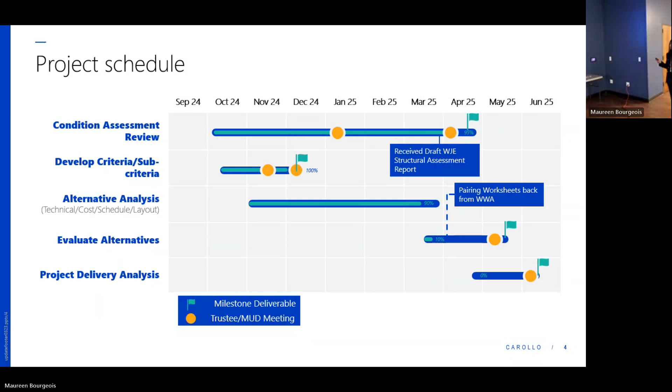So let's talk through the existing condition verification update. The next 2 slides are going to be a recap of some of the information that was already presented at the trustees meeting.

Our scope included verifying the previous assessment that was performed by another consultant, reviewing and updating the condition data that was developed before, because that assessment was done in the 21-22 timeframe. So we wanted to update what the condition of all the assets at the treatment plant were. We also wanted to calculate the remaining useful life of each of the assets, and then based on the assessment, come up with a list of repair-in-place components for each of the assets at the treatment plant that would form the basis of our base case, alternative 1.

While we do that, we were also tasked to perform a regulatory compliance and deficiency review to make sure that the existing plant can meet the TCEQ criteria, which is based not only on the process capacity of each of the process units at the treatment plant, but also the hydraulic capacity of the plant. So we did perform that evaluation report.

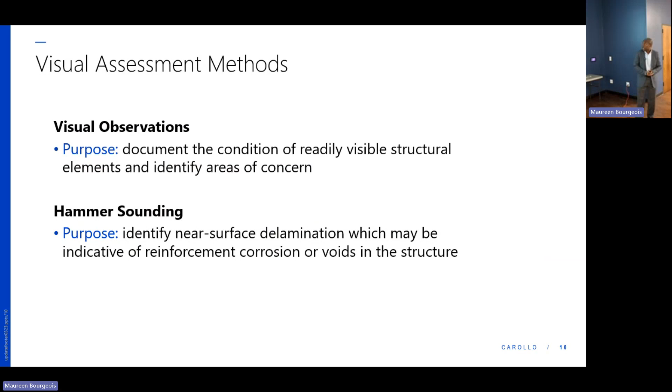Let's get to non-destructive testing methods. As the topic indicates, it's non-destructive—we don't want to do anything that will bring damage to the structure. All these testing methods result in no damage to the structure; it leaves the structure as is, as we saw it, so that it can continue to function.

What is the purpose of it and why do we want to do it? For half-cell corrosion potential, it helps us identify whether there's active corrosion taking place. We get a reading, and from that we're able to interpret whether there's active corrosion behind the concrete that we cannot see. Electrical surface resistivity determines the risk of corrosion—what's taking place behind the surface when we put the equipment there to give us that data.

Linear polarization determines the rate of corrosion—how fast is this thing corroding? That equipment is also able to give us that data.

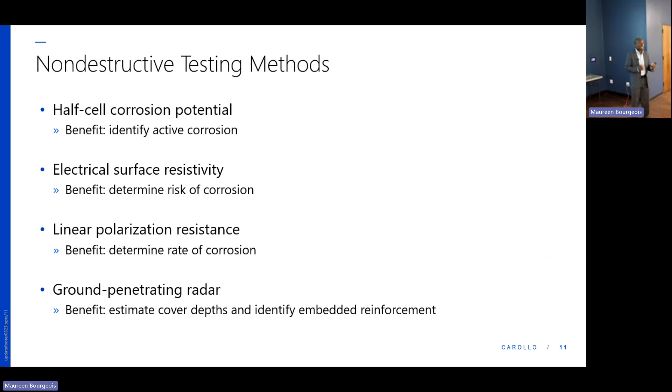Let's get to laboratory testing. While we can do the earlier equipment-based testing, there's still stuff we generally cannot see, and we have to go into the lab to do more in-depth study. For the structures, we took cores—basically we drill a core sample, a 4-inch diameter by 8-inch long sample from the structure, a concrete piece. We extract that out and then test it in the lab.

There are various tests that we do on these cores. For all the structures, we did a total of about 26 cores to test them, because we wanted enough data to come up with a great assessment of what we are actually seeing. What are some of the tests we did on these cores? Let's start first with carbonation testing.

When we think about air, air is made up of different components, and carbon dioxide is one of them. As humans, we don't inhale carbon dioxide, and it's also not good to some extent for the concrete. Here is what happens: when carbon dioxide comes in touch with the concrete, it actually begins to work against the chemical properties in the cement.

There are hydroxides, some chemicals in the cement, and it breaks it down. The cement is typically alkaline. The opposite of alkaline is acidic, so it's not acidic. But the carbon dioxide reacts with it, breaks it down, and gets the concrete to go in an acidic direction. That is really not good for the reinforcing in the structure. So now it begins to deteriorate the concrete and then begins to deteriorate the reinforcing with the right amount of water and oxygen when they come in contact with it.

So we want to measure that level within the structure. Because we know the concrete cover, we're able to do that. How do we test for the carbonation?

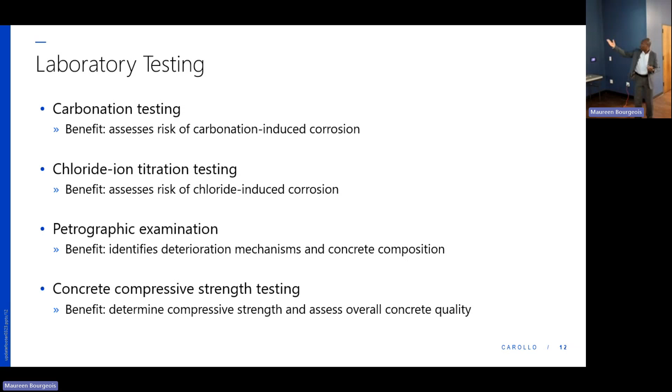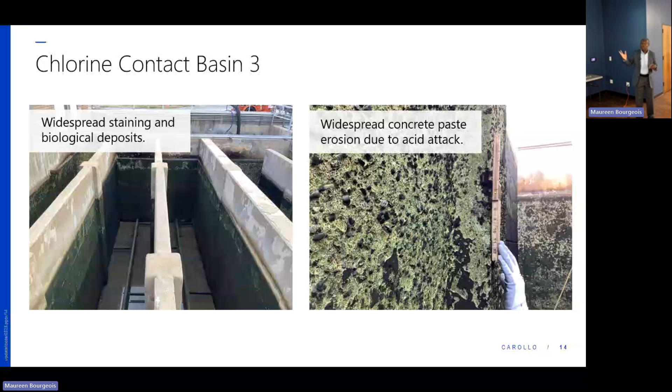Additionally, because the bacteria is so active in this environment, it also begins to attack not just concrete but other elements of the structure. For example, in the chlorine contact basin, we had a concrete masonry unit, CMU wall, that was easily abradable - you could easily take a sharp edge and scrape it off because it's a very aggressive environment and the bacteria is beginning to eat it up.

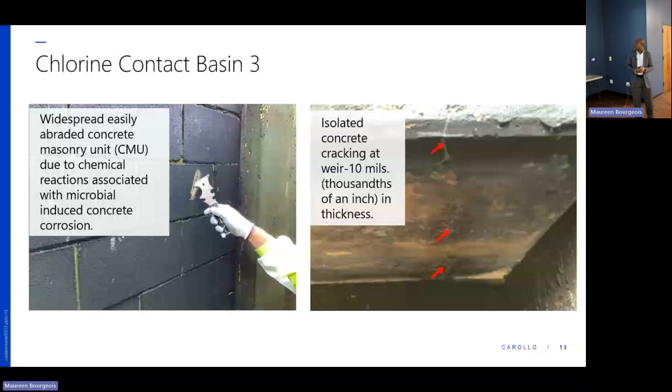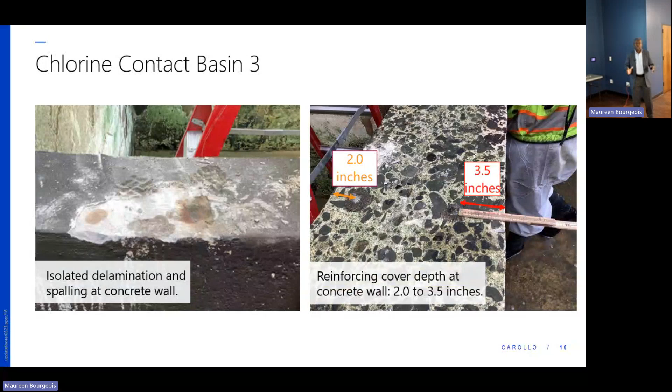So after all our analysis of the chlorine contact basin, what is our recommendation? Well, we recommend periodic visual observation, just like we did, every 3 to 5 years, just to see the structures continue the way they are, or if they deteriorate further and need further action. Non-destructive and lab testing and in-depth study, we suggest every 10 years for that to be performed on the structures.

And then in areas where we see delamination, spalling, as shown in the previous pictures, some with acid attack and things like that, we are recommending concrete repairs and the application of a coating system to protect the structure and extend its longevity. We are recommending all these repairs and coating applications to take place within the next 3 to 5 years - a good time to actually do it.

That'll also be the same recommendation for replacing the CMU wall, the concrete masonry wall. We are recommending actually replacing that with a concrete wall, since that will give more durability, and that can also happen during the repair work within the next 3 to 5 years.

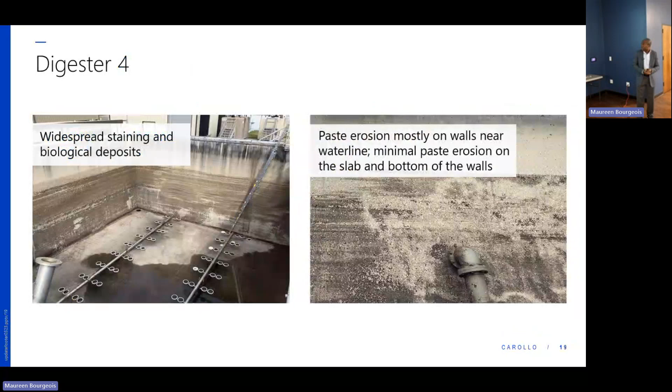At the bottom of the walls and at the slab, none of that was observed, which is typical for such structures. On one end of digester number 4, though, we talked about the concrete cover - there you can see particularly a reinforcing being exposed. Likely the concrete has spalled off or broken off due to some corrosion, something happening there.

The reinforcing is too close to the edge, so you don't have that 2 inch cover, but that's an isolated incident. We captured that occurring there as well.

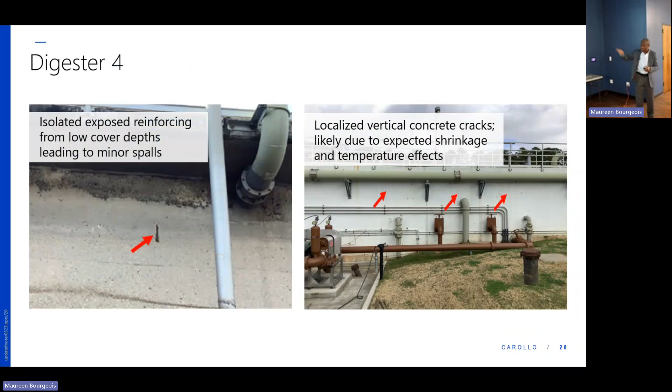As we walked around the structure, we see local vertical cracks, very fine hairline cracks. That's typical because with concrete you have cycles of temperature, cold and hot, which allows the concrete to expand and contract, causing these temperature or shrinkage cracks. None of these that we saw were leaking as far as we could tell.

So what is our recommendation for digester number 4? Again, the same thing: periodic visual observation every 3 to 5 years, monitor just like we did to see if anything changes. We've also recommended non-destructive or lab testing every 10 years to see if the situation deteriorates from the benchmark we have today.

For those areas where we have localized spalling with reinforcing exposed, we recommend concrete repairs and application of a coating system, at least on areas where the paste or surface of the concrete has eroded. We recommend that work take place in the next 3 to 5 years.

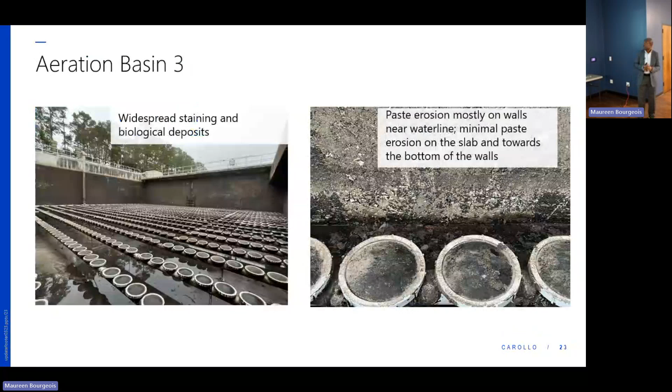So for aeration basin number 3, what are we recommending? We did all our non-destructive testing with our equipment, and it reveals that the reinforcement is not actively corroding in the areas of the walls and slabs that we tested.

The cover depths from our equipment testing show that the walls have about 2.8 inches of clear cover. We talked about needing a minimum of 2 inches from the face of the rebar to the face of the concrete - we have 2.8, so that's good news. At the slabs, we have 4.8, also good news.

With the laboratory testing, we took 8 cores for the various lab tests we talked about earlier. We start with compressive strength - the load the concrete needs to see before it crushes.

That load for this particular structure ranges from 4,700 to 8,000 pounds per square inch. The minimum we want for this structure, documented on the design drawings, is 4,000. We exceed that, so the structure has the structural capacity to hold.

Carbonation depth, we have 0.25 inches. When we looked at that, we talked about carbon dioxide attacking the chemicals in the concrete. We have 0.25, and our clear cover is 2.8 at these walls, so that's also not of concern.

And then chloride concentration - when we did all our chemical testing in the lab with the amount of chloride ions, we came to less than 350 parts per million, which is the benchmark. You want negligible risk, and so the structure is not at risk from chlorides.

We also did one more thing here, petrographic examination, because this was one of the structures for the in-depth assessment. We could see that the first 0.1 to 0.2 inches was deteriorated due to the sewage attacking the face of the concrete. We saw that in one of the pictures where the paste was being eroded. But again, it's not to the cover. We had enough cover to be able to get things to look good or work.

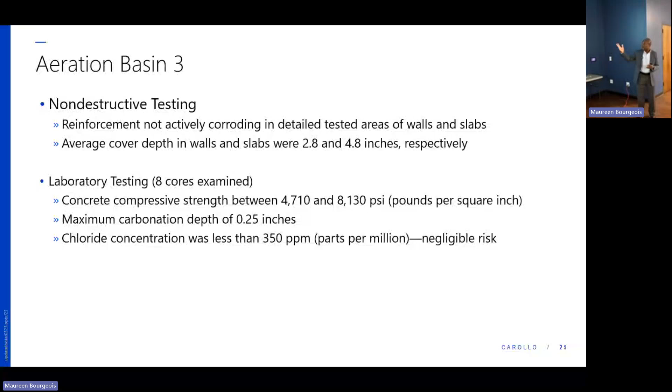So what is our recommendation for the aeration basin? Again, visual observations every 3 to 5 years to take a look at that visually and see how that structure is still performing. Then non-destructive and lab testing, which we talked about, every 10 years. And then we are recommending those areas that are delaminated. We saw the earlier repairs. We said the voids are likely there. We need to concentrate on it. And then also the paste on the surface being eroded, applying a coating system. We recommend that work take place in about the next 3 to 5 years.

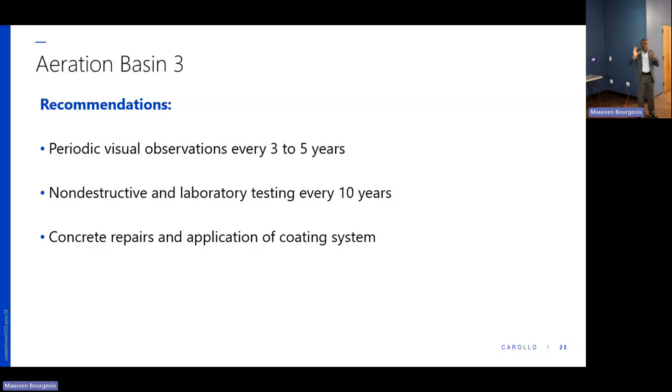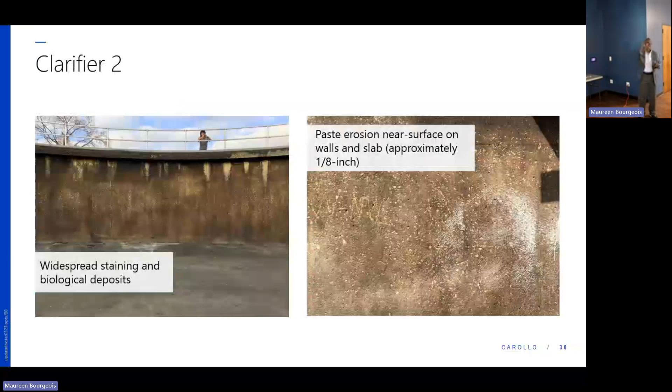So what did our non-destructive testing reveal for clarifier number 2? Well, the reinforcing is not actively corroding in the areas that we tested. All the handheld equipment testing data verifies that. The cover depths that it measured was 2.3 and 10.1. In the walls of these structures, we want at least a minimum of 2 inches. We do have that here, so we are good there. We tested 10 cores in the lab under the additional lab testing to verify the compressive strength, which tells us the strength of the structure.

Again, it's well above the 4,000 mark, which is on the drawings. In this case, we're in the 5,000 to 8,000 range of all the cores that we tested. So the structure is structurally sound. Carbonation depth 0.13 inches, also less when we think about the cover, so we have enough. And then the chlorides are also below the 350 parts per million, so it's considered negligible risk.

There's the good news - the petrographic examination showed no ASR was observed. We talked about ASR earlier. All 3 cores we looked at here, no ASR was observed. Under the microscope, 0.16 to 0.2 inches of concrete was deteriorated. The clear cover was 2 inches, so we have a little bit to spare.

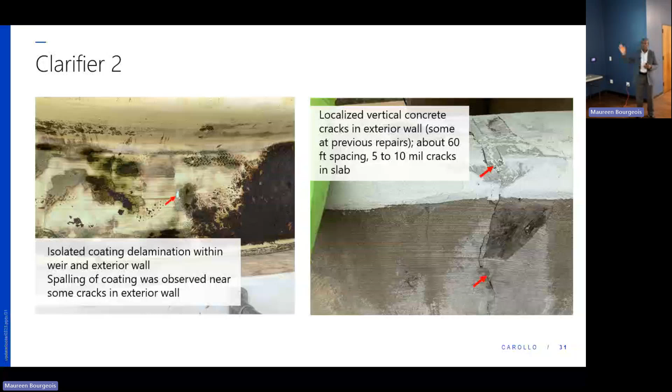So again, similar recommendations: visual assessment every 3 to 5 years, non-destructive and lab testing every 10 years. For the areas, especially at the top where we saw that massive, aggressive erosion, we recommend concrete repairs for the cracks and application of a coating system. We recommend that work take place within the next 3 to 5 years. For the lift station, since that's an aggressive environment, when we go in to do the concrete repairs, we should also look at an additional in-depth corrosion assessment to see what further protection the structure needs, just to extend its service life in the long run.

Then we come into the pump room, which sometimes we also call the dry room, because that's not the wet section. In the picture on the left, we see some staining and efflorescence in some of the wall cracks. What is efflorescence?

When you have a crack, usually in the concrete wall or in a slab, water begins to migrate through it. As the water migrates through the cracks, it reacts to the chemicals in the concrete mix or in the cement. As the water gets to the surface, it evaporates and leaves behind these whitish chemical deposits. That process, with that deposit being left, is what we call efflorescence.

The next slide will show a zoomed in picture of what one of them looked like. At the bottom, in one localized corner, we saw water ponding at the perimeter of the wall. That's likely coming from leaks from those cracks or some of the pipe penetrations that go through the structure.

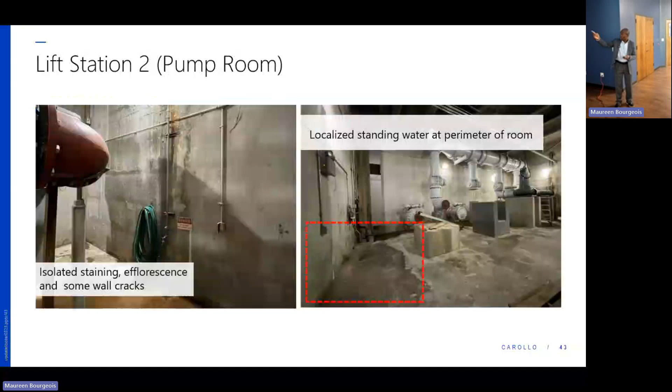We also saw local coating coming off the wall, so delamination, falling off, peeling off from the wall. We want to address that too. That's the efflorescence in a zoomed in view, as you can see with the whitish substance being left behind as the water evaporates in that crack.

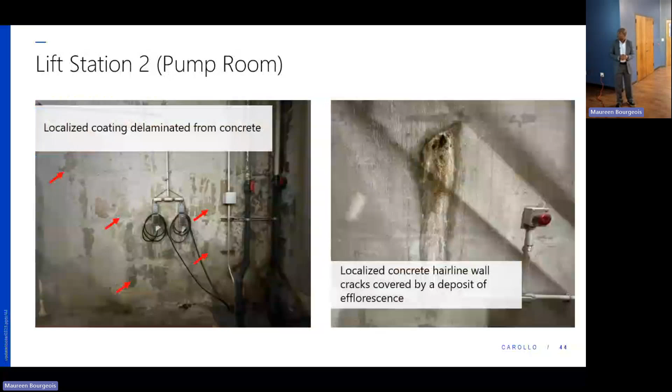What did the non-destructive testing reveal? No active corrosion, but it also showed a lot of moisture at the bottom. The previous picture I showed, with that water ponding, captured that it's very moist at the bottom. The cover depths measured with our equipment were 3.8 at the walls, 10.7 at the slabs; we want a minimum of 2 inches, so that was good.

We also tested 8 cores here. We're in the 6,000 range for the compressive strength, well above our 4,000 mark for concrete, so that is good. Carbonation is at 0.63 - we have enough cover to accommodate that - and the chlorides here are also negligible.

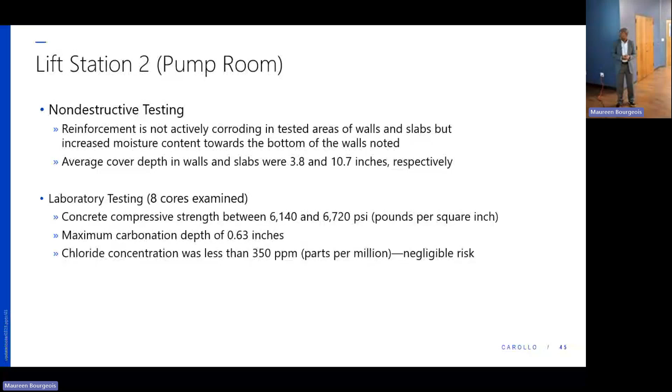So again, petrographic examination - looking under the microscope - what do we see? No ASR were observed in the 3 cores that were tested. Concrete here shows no deterioration, that's the dry portion, and there are no other mechanisms for cracks that we saw in this segment.

So recommendations: 3 to 5 years visual assessment, just like we did, to see if anything is changing from these structures. We also recommend in-depth analysis every 10 years. In the areas where we described the efflorescence and the minor cracks, we want to go in and fix it. In areas where sewage is probably affecting it, just like the wet well, we want to apply a coating system when we do this work. Our recommendation is in the next 3 to 5 years.

Plant capacity assessment.

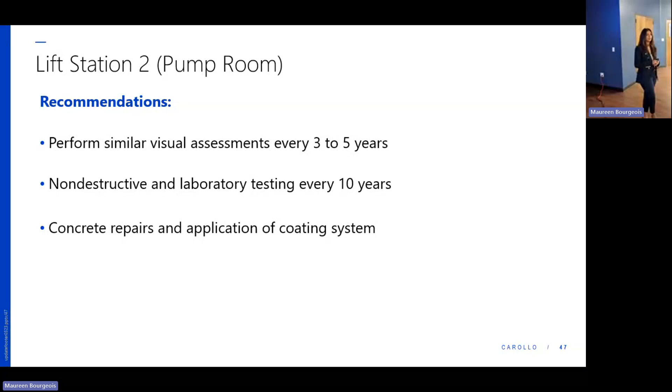Yes, we can, but I thought this would be helpful for you all to understand, because the existing plant condition or the assessment of an existing facility is not only condition, but it's also condition plus the capacity.

Sure, we can take those questions. We have noted the questions downstairs, so we'll definitely come back and bring back the slides, if that makes sense. No, it does.

All right, so as I mentioned, the existing plant capacity is equally important when we are looking at the assessment of the treatment plant, because we are not only looking at the condition of the assets on the ground, but also whether those assets can treat the capacity or the flows that are coming through the plant.

So how do we go about doing the capacity assessment? We are looking at two main components: incoming wastewater flows and the water quality coming in. So what is the load coming into the treatment plant? And what are the TCEQ permit requirements for what's coming out of the plant?

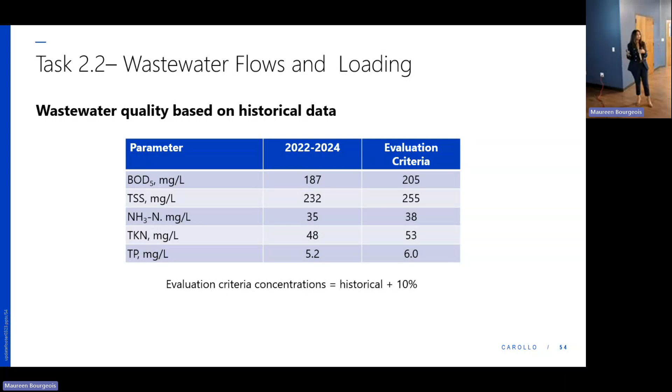As I mentioned, we talked about the wastewater treatment influent flow coming into the plant, the loading, and the TCEQ requirements. Now let's talk about the treatment process itself. Can the treatment process treat what's coming into the plant and still meet the TCEQ requirements? To do that, we look at two specific things: the process capacity and the hydraulic capacity of each process area. Process capacity is the ability to treat the wastewater flows and loading to meet TCEQ Chapter 217 criteria. Hydraulic capacity evaluates whether each process area can convey the peak 2 hour flows through the plant, regardless of the process capacity, so the water can flow through each process area without submerging weirs or overtopping walls of each structure.

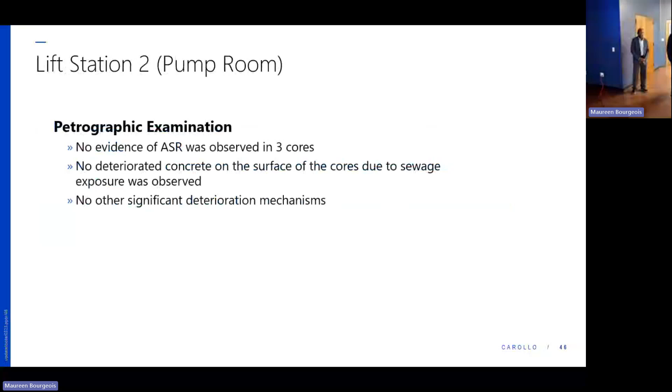Taking questions. She has a list of everybody that raised their hand for a question, and we're going to go through the slides.

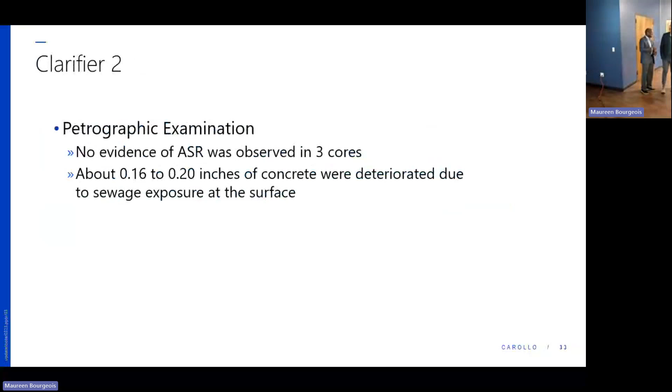Slide 6. First off, great presentation. A lot of really good engineering work has been done. Appreciate you taking the night to update us on it.

Okay, I'm Brad Hound from MUD 7. I want to say thanks so much for taking time to present this tonight. A lot of really good technical work. A couple of questions on slide 6.

So you refer to remaining useful life values being calculated. I did not see them in the presentation. Granted, I didn't read every page of the technical reports, but I didn't see that. That seems like it would be something very useful for us.

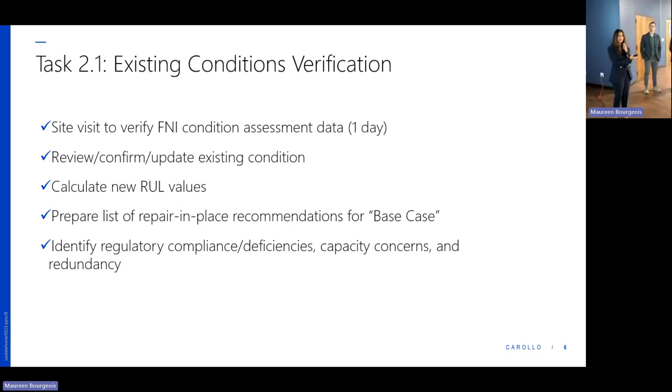So we have to now go through that. So between that 60 to 70 years, what has been spent, now we know what WJ recommended, so we can take their recommendation, subtract that, and give us the...

No, that doesn't answer my question. The question is, if you do the recommendations that are on each structure, does that get you an additional 20-year useful life? Thank you.

Also, yeah, wait, push the button. Yeah, well, Brad asked one of my questions.

The other question I had was regarding preparing a list of repair-in-place recommendations for the base case. Was that just a summary? I'm sorry. Yeah, of course.

On your fourth bullet point, Brad asked about item 3, and I just want to clarify on 4. Are those repair-in-place recommendations for the base case the ones that were in the recommendation slides that you presented in the presentation?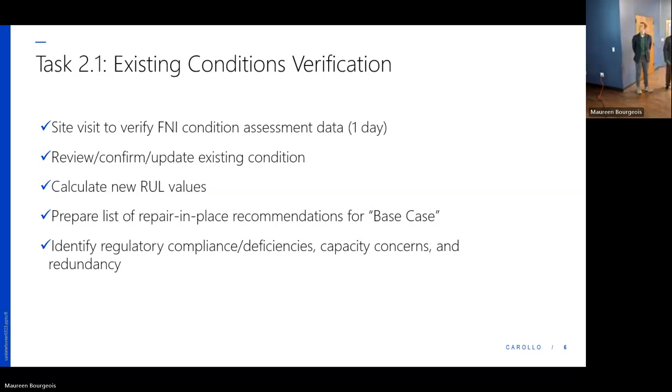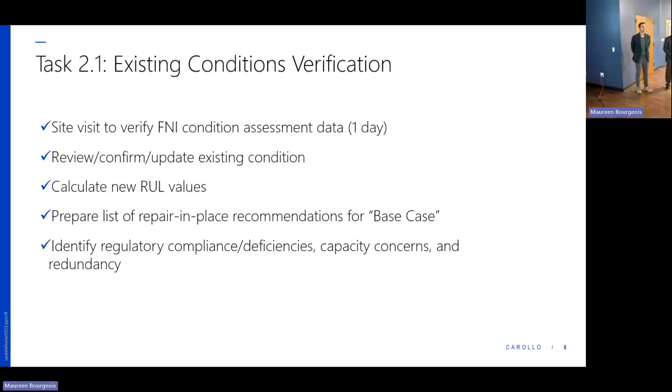Your microphone. Okay, my microphone. Okay, I have a question about remaining useful life. So a number of, I gotta press the button? Stand up. Oh, stand up. Oh, we don't have a read. Okay.

So I have questions about RULs. A year or so ago, I read a document published by SGRA which detailed out, by asset tag, all the remaining useful lives of every asset tag they have. Is that the base document you're using to establish the remaining useful life, that document that SGRA has to pay for?

Previous report, we were reviewing, and we were to go out into the field to compare our field observations with the remaining useful life that was in the report. So that was a point of reference, but we were using our on-site assessment to understand, from our point of view, how much life is remaining on your assets. Does that answer your question?

So I guess my observation is, if you go back to that report, it's a single statement: it's a pump, it has 7 years remaining useful life. It gives no more detail than that. And you know as well as I do, any moving equipment, which this organization is packed with, depending on how often it moves, how it turns and twists, has a unique useful life. So in that document it just says it has 7 years. It doesn't tell us anything about the condition, the age, the date of installation, anything. So I'm just curious how you can establish a remaining useful life when the beginning input is an asset tag number with the statement that it has X years useful life. I guess I'm a little concerned that we're taking shortcuts.

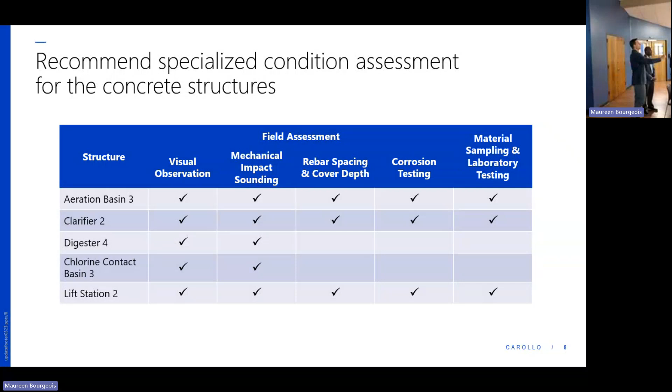That's my first question. In particular for that, our petrographers look under the microscope. We're able to evaluate what the water-cement ratio might have been, or the coarse aggregate size, or the sand that was supposed to be used. We don't have that original specification to compare it to. We're confident in what we saw, and everything we have in our report says here's what we had, water-cement ratios between 0.4 and 0.5, that kind of stuff. We can't compare it back to a known design and say it did or didn't meet the original design intent.

Okay, good. It looks like pretty good for good purpose, does it really matter? No, you just didn't have that to start with. We didn't have a starting point. Your testing looks like it's still pretty good concrete, right? Yes, it's got the testing strength you need.

All right, the second thing is around the assets that weren't studied. We picked a few here, and I think you said, Kwesi, that you thought this selection of structural components was a good representative sample. How good do you feel about that? Give me an example, I want you to address directly, I think it's clarifier 3 that has the bulging wall, the famous bulging wall.

The Aeration Basin 3, okay. How good do you feel about this correlation from one asset to another, the one you tested versus the one you didn't test? And how confident should we feel that there's not some problem with just drawing that assumption to the rest of the asset base? Very, very, very good question. So what we did was we sat down and listed all the structures, and we have the drawings, so we looked at which year these sets of structures belonged to.

Right, so that's the age piece of it. And then we also looked at, for example, the field report of the one that was bulging, that's the Aeration Basin 3, that's the worst case condition, so for sure we wanted to test that. We selected the Aeration Basin 3. And then the size of it, just the sheer size, is one of the big structures, so you sure want to test that. And that correlates with some of the structures constructed around that time frame, around that year.

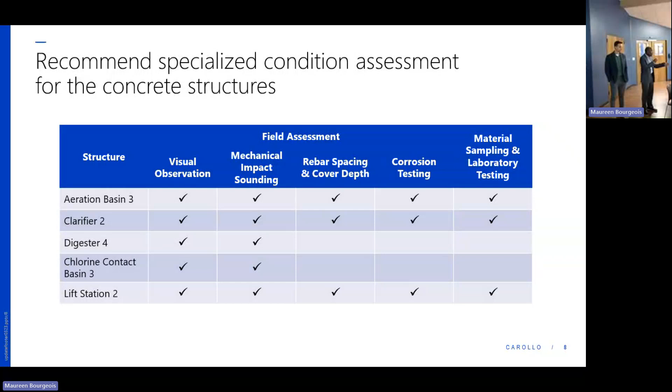So we looked at that piece of it, very confident, because to be representative of the concrete mix used during that time—since we don't have a specification to go to, we have the drawings that tell us, but we want to verify it, so at least with that benchmark we are confident. And then we pick other structures, because as a structural engineer, you design different structures differently. So I picked a square one, but I wanted to pick something not square, so I picked a circular clarifier, which was also constructed at a different time, so it would likely have different properties, and that will correlate with some of the facilities.

So for each facility total, we grouped them by drawing set, making sure we picked representatives from all of it so we could be very confident we'd captured it. And then from a visual assessment, which ones had more cracks than others, those were good candidates. Which ones did we get reports from staff about, like this bulging wall fixed—those were good information to have. That really helped us narrow it down to pick some good selected structures.

So we should feel good about being able to extrapolate this information to the other structures and have a high degree of confidence in that. That's what I'm saying. Okay, absolutely. And the data so far, it correlates. As far as the fight, if we saw some unique variations, then we'd start saying wait a minute, let's pause and take a look at something. But it really correlated. That gives us full confidence.

And we look back in the codes for those areas where it was constructed. That's why the 4,000 benchmark is critical, because that's what was used back then. And even until today, the minimum is 4,000, right? So those things give us a good feel for the good work that was done.

Perfect, thank you. These are the same structures that we talked about in the January trustees meeting. Yep, I remember. We move to slide 18. And then Mr. Smith.

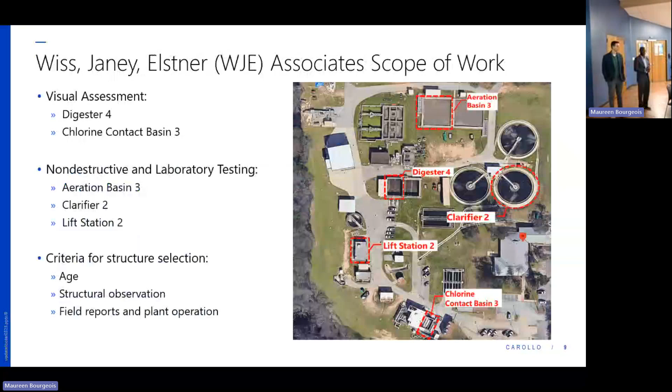Did it as well, but the detailed assessment, lab testing, WJE testing - the WJE report is only an appendix to our assessment. Okay, so you're still doing the mechanical, electrical? No, you don't have it yet. That's the report we're working on.

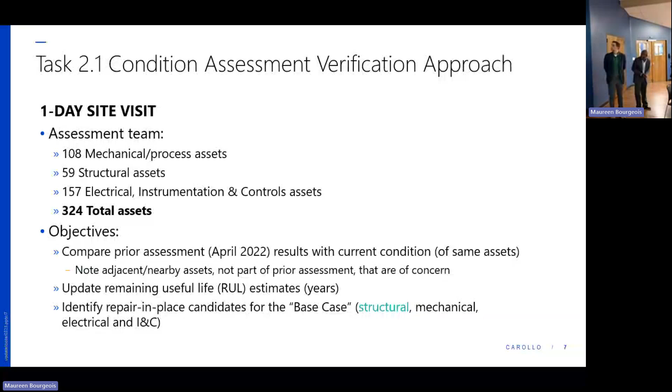Slide 18, folks. And we have Mr. Davis. 17, 18. Yeah, so maybe you have the wall.

You talked about the CMUs, the concrete masonry units, and you recommended repair of that CMU, replacement. What's the advantage of doing CMUs versus concrete? Especially in a wastewater environment, it's very corrosive in nature. It will eat it up, and we are looking at the longevity of the structure, extending it not for 1 or 2 or 3 years, but wanting to extend it out further. With the concrete, you get that capacity for a longer time.

If you notice, just out of the picture - it's difficult to see here, but these original walls where the dumbbell kind of columns are, it's like this dumbbell-shaped structure of the square wall. That's all concrete. It's these supplemental wing walls that were added later that are CMU. So it's not a whole lot of the walls that are CMU, but there are portions of them.

And my hunch is CMU is cheaper to build, for sure. There's no reason to do it, but yeah, that could be replaced. It's not the entire structure - there are small portions of the walls.

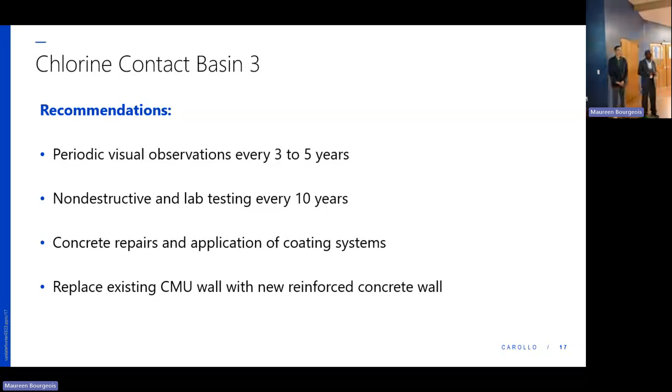I'm with 146, and I've got a couple of questions and observations for you folks. First, building off Brad, John, and David's comments on the remaining useful life, it would be interesting if we could get a simple chart talking about when that asset went into use, how long it's been in use, how many years are left, the remaining useful life, and if we could take some type of preventative steps prior to the expiration of the remaining useful life.

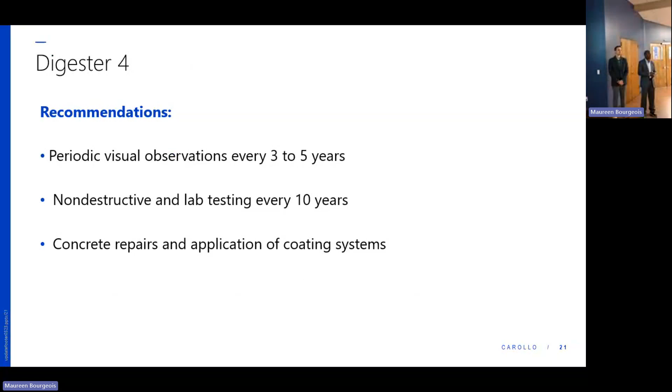And it begs the question of preventative maintenance, because several times in your report it was indicated that you could not do visual inspection due to paste, gel, whatever the case might be, staining and the like. It seems to me that 3 to 5 years for periodic visual inspection is a little long. Most PM programs, at least in manufacturing experience where I come from, happen every 6 to 12 months. And whether it's scraping - I guess the current technology is scraping, water jets.

Some of my research talked about other processes such as impressed current cathodic protection, chloride extraction, realkalization, and electrokinetics. And I don't know if any of that has been included in your thought process for not only extending the life of what we have, but looking at the new technology that's available, even in cement manufacturing process, because I did some research of current literature. And there was one article that I wanted to refer to you, if you've not seen it or not aware of it, and I have it here someplace.

Yeah, it was an article by Michael Bernard, published in September of last year. He talked about the electrochemistry that makes low carbon cement and also makes it more solid. The reference I got was from Futures Electronics, and they referred to one company, Sublime Systems in Massachusetts, which manufactured this process. If they have enhanced concrete production coupled with those processes I mentioned earlier, that could help mitigate the issues not only of the chemical reactions, but also of the bacterial, anaerobic and aerobic organisms that grow. It could be helpful to expand even to a further length of time.

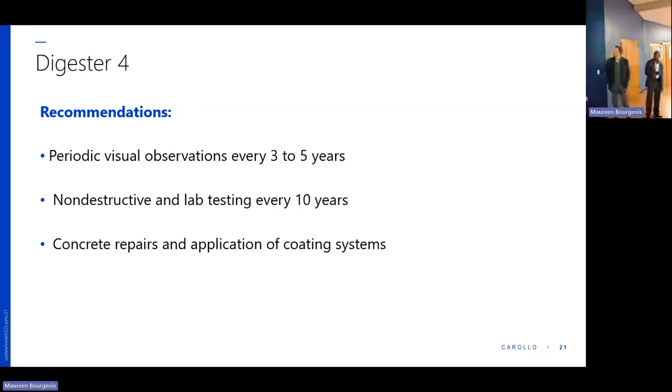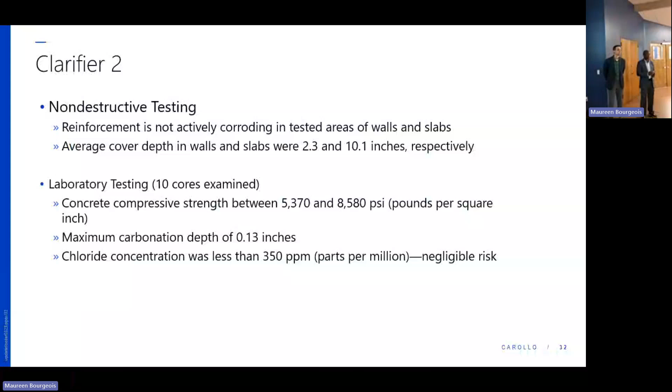Mr. Smith, yeah, this question was for you. Recommendation -- I had one before that too, let me ask you that first. You have carbonation, chloride concentration less than 350 ppm, and cement coverage of 2 inches or more. What's the minimum and maximum of that you look for in the 350 ppm?

That's when that protective layer over the steel can start to break down, and now the reinforcement can corrode. If the chloride concentration goes above that, say 500, 700, 1,000 ppm, it's much more likely that things are corroding. And we were a lot lower than this in most of the structure.

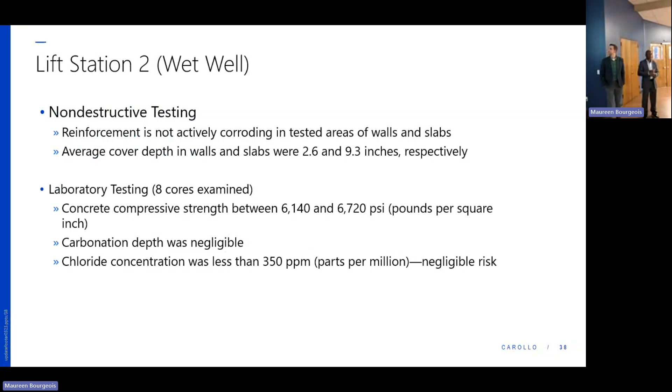Okay, now lift station. Yeah, lift station. So Ed, I'm going by memory here. Sometimes you forget. I remember looking at a 10-year plan, probably 3 years old. In it, you talk about the rehabilitation of lift stations, and you had like 2.7 million or something to rehabilitate. But I thought that was lift station 1 that you wanted to rehabilitate.

Lift station 1, and Chris helped me, I may need some of your memory too. We had in the 10-year project plan to do some rehabilitation and set it aside until after these studies could be completed, so that we didn't do something that would end up being wasted if a new station was built. And remember, we're doing the optimization of lift station 1 and 5. So when you were speaking, yes, both lift stations.

Lift station 1. 2. Okay, I just saw one of them, I thought it was 1. You were talking about the reason to rebuild, let's just say revitalize, lift station 2 because it didn't have enough pump stations. But lift station 1 has 1 or 2 more pump stations, and I thought that was the reason why you chose to rehabilitate that one versus 2. Am I missing something here? It's been a lot of years.

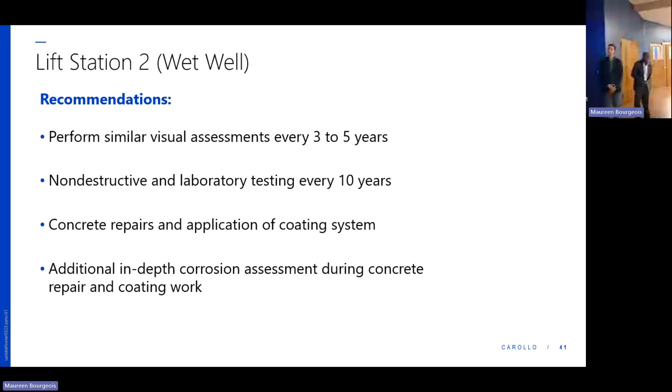Any questions? I think so, on the recommendation side. It's nice to see historical evaluation criteria. I guess I would like to see current permitted, current design. And I was surprised to hear what I thought was your comment that the current plant can't meet its current permitted capacity. Is that your current conclusion? Yes.

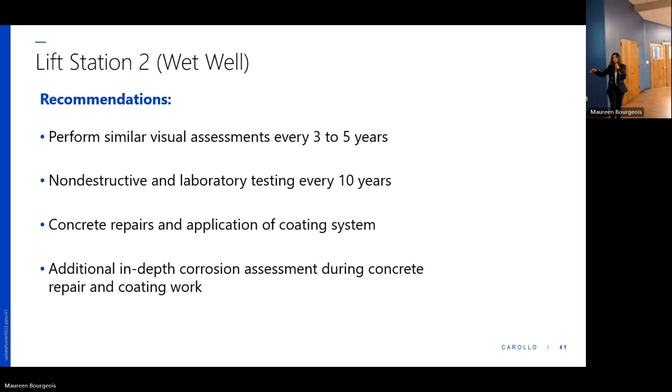So I'm not sure, I mean it seems to me like you're building a design case for a 2-hour maximum flow that's higher than our current permitted. And I also thought you said we couldn't meet our current permit, but I thought we could meet our current permit. So can we meet our current, is the kit on the ground adequate to meet our current permit?

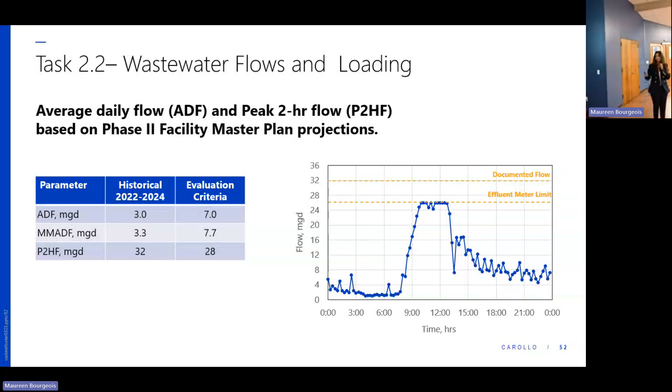So I think we'll take this offline, but I think we're very, very concerned about the basis that you're using for your evaluation and how that's consistent, or inconsistent, with prior studies and prior performance.

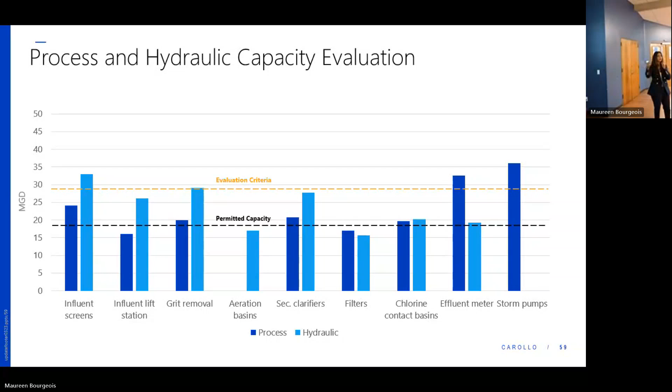Well, come on, that's not true. No, you just added new capacity, new units. The only way you do that was with the design. And what are you doing? You're doing a design based upon those, right?

But you're being disingenuous. You're saying you're not designing a facility, but when you're going to present in 3 or 4 weeks an NPV of a plan for this so-called repair in place, which is mostly new in place, you have to include your assumptions. That's a design. And all that's being driven by, as far as I can tell, one chart that you've shown us without any detail or backup or discussion from any of the MUDs as to whether it's valid and whether it makes sense to design a facility for that. It may, we don't know. And if you're going to dump this on us in 4 weeks, that's not long enough to understand. That's not going to work.

So you're choosing a number, right? That is a rare event. A rare event which the Texas Commission on Environmental Quality doesn't even fine for because they know it's a rare event. And you're using this as a basis to do a net present value. The TCEQ requires that the peak 2-hour flow is 4 times your average daily flow. Average daily flow based on the master plan of 7 MGD, 7 times 4 is 28-ish. So that's how we got to the numbers. We are not designing it for, are we?

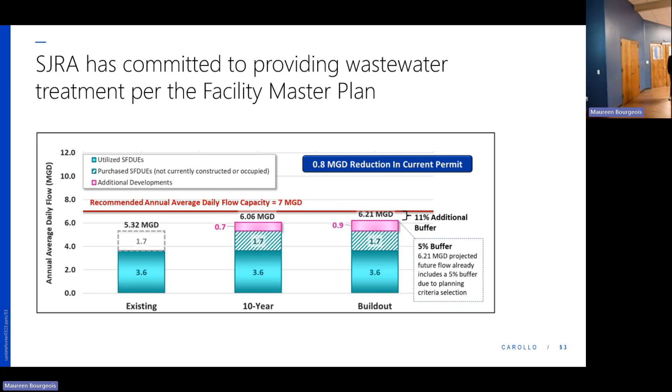Was it condition assessment? And has it moved to capacity planning? I'd like to get that answered, because I think when we did that master plan, the alignment was if we go from current 7.8 to 7, we can live with existing infrastructure, either replace in kind or maintain.

But remember, we were quizzed by several directors on the difference between chapter 317 and chapter 217. We told you all that the minute you go in and change a basin, take the lift station as an example, the minute you combine the two lift stations into one, that kicks you into the 217 rules, which are a little more stringent than the 317. We did indicate that to y'all.

And I would seriously question whether TCEQ is going to make us replace clarifiers by us deciding to build a new lift station. No, I didn't say that. But you also didn't let me finish.

But if we have a requirement by TCEQ to have 4Q, 4 times the average daily flow for a 2-hour peak, we do have an obligation to supply that capacity for the 2-hour peak. We've proven we've gone over the 28 million gallons just from several storms that have all occurred within the last 10 years or so.

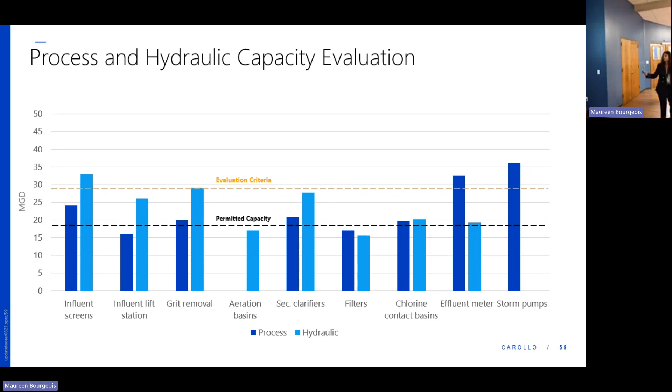You all have seen exactly what we've seen. You bought a whole bunch of new kit in it. All Maureen is showing you is the fact that certain processes don't meet the hydraulic capacity required by TCEQ. That doesn't mean we're designing anything. You haven't authorized us to design anything.

And one thing is clear: if we change a lift station, we may have to do some other modification. Do we have to modify the whole entire plant to meet the new requirement? Well, that's not what I see. In other words, I'm asking for a schedule to show me, if I move what basic critical pieces, what do I have to do and how much of this is required now?

I think we need that. We don't have it, before we go to the voters and ask for more money. We're not asking you to go to voters right now. What we're asking for is to listen to what's available.

Next month will be more information, the month after that will be more information, then we'll have a whole picture in front of you. Look, we've seen a schedule that says we're going to try to make a decision in a couple more months.

And I think what our frustration is, is that we got a lot of information here we've never seen before, presented to us saying, you know what, that repair in place is not really just repair in place. It's alter a hell of a lot in place and build a bunch of new stuff.

First of all, I want to apologize for some of these folks, the way they're talking to you. I think they're way out of line. You can get a bunch of new information, you can ask questions. Eric asked us to be respectful of each other and of our guests.

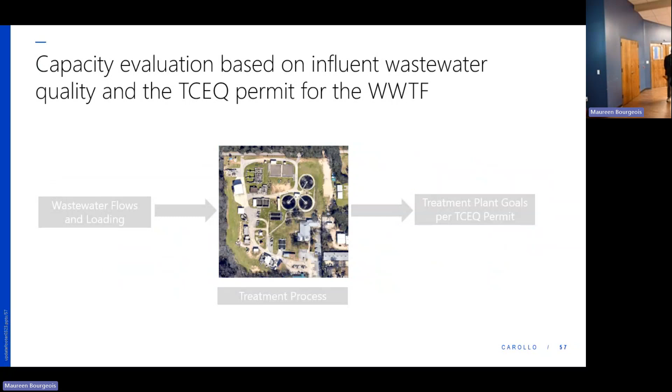That's fine. One of the questions I had was you talked about outfall 1 and 2, and you said 2 has a tighter permit on it, but you use that. How should we look at outfall 1 versus 2 in assessing the whole thing? Some of these are very strict compared to 1. How do these two work together, how the permits work together? I just don't understand that part.

Meets outfall 2 criteria. So the way that water flows through the entire plant and then goes to the 2 different outfalls, it still follows the same process. Outfall 2 has stringent requirements, and the process that meets outfall 2 automatically meets outfall 1 as well. It's the same water going through, but then it splits, if that makes sense. Part of the outfall, sorry.

Yeah, I've seen it, they're not separate, it's the same basin, just 2 pipes leading the same. Okay, so they're right next to each other. So the water flows the same path, the same basin, and then just...

Is it split equally? No, the flow going out - that's the average daily flow. Gotcha, okay, because it's the same water, it will follow the same process. We wanted to make sure we meet the outfall 2 criteria and not just take into consideration outfall 1. Gotcha, so for our evaluation we use it. Okay, thank you.

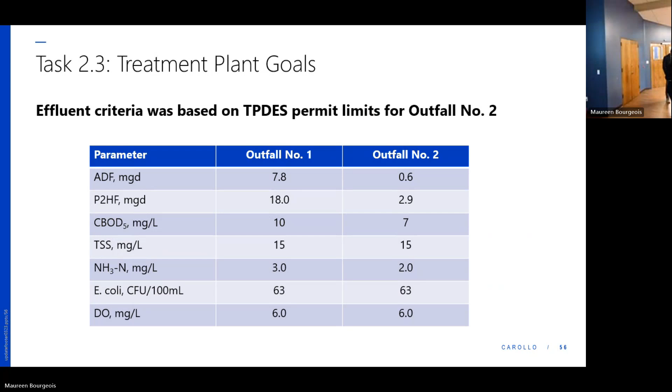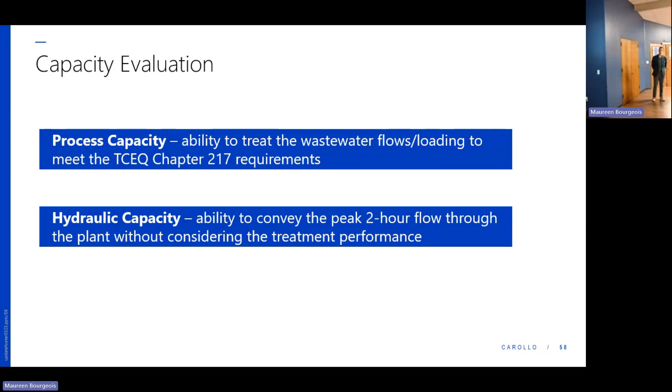This was more of a tactical question. I realize now this is more for the SJRA, but the website, so I'll put it out there, Ed and company, as a request. The website asserts that the existing wastewater infrastructure at the Woodlands is aging, with certain treatment and conveyance components expected to reach the end of their useful life in the coming decade. Improvements must be made and actions must be taken. I take that part of what we saw here, based on what I hope in the next session we'll have some quantifiable data to translate these assertions.

The statement must be made, I was interpreting it as the base plan. One of these variations, one of the 4 to 6 variations, must be made. That's how I interpreted it.

Which website? It was the SJRA, let's see, I have it under sjra.net. And then wastewater treatment facility number 1, and there's a description of the project. It makes reference to Carollo and property acquisition services, which I guess is in case you have eminent domain to purchase the private land lots on the top left and right. Yeah, and it was that one.

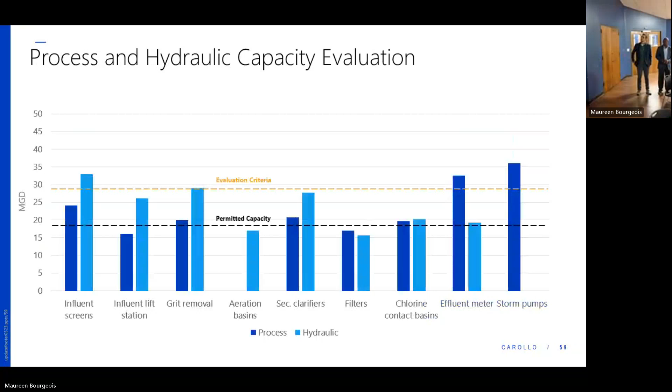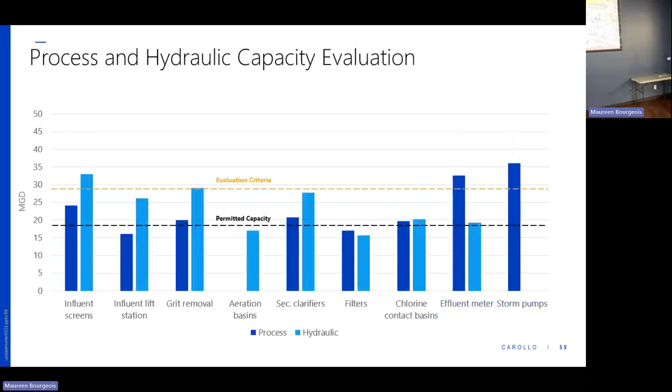We wanted to keep it apples to apples. You can choose not to add those admin or maintenance buildings under alternative one. We can easily remove those four items that are common across these alternatives. That is, of course, your choice and whatever the recommendation is. But we wanted to keep that aligned and similar, as I said, an apples to apples comparison. So you're not looking at the maintenance building or the existing equipment information. That's why that was happening. That was really the basis and reason why we had this core structure.

So the stormwater retention pond makes sense if that's going to be required. The other ones make no sense, as they're an addition, an extra step beyond your base case that you were trying to define. I understand why you did it, but I don't think it's a proper way to attack a base case.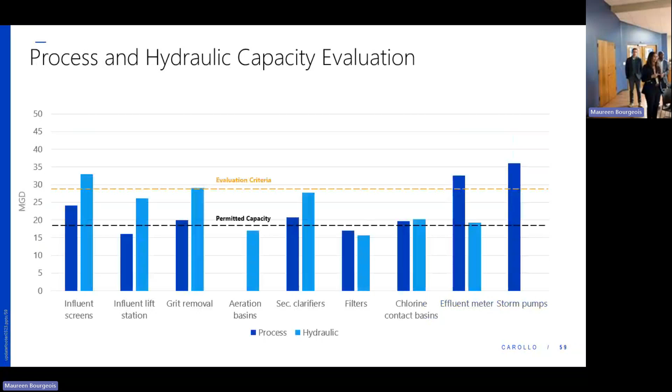Do you have another question, Greg? I think we already asked that. I have a question on this one as well. Did you have a question?

Oh, my only question is, I think the more we hear, I think you misunderstood the original intent for the base case, alternative one, which was supposed to be a low cost, minimum effort, extend the life for 20 years approach. It wasn't meant to be an apples to apples comparison with going and building brand new stuff. It seems like you've added a lot to alternative one, which will drive the cost up and make it closer in cost to alternatives 2, 3 and 4, which wasn't the objective. The objective was to find the lowest cost possible solution that keeps our plant running for the next 20 years, and that's not what you're doing.

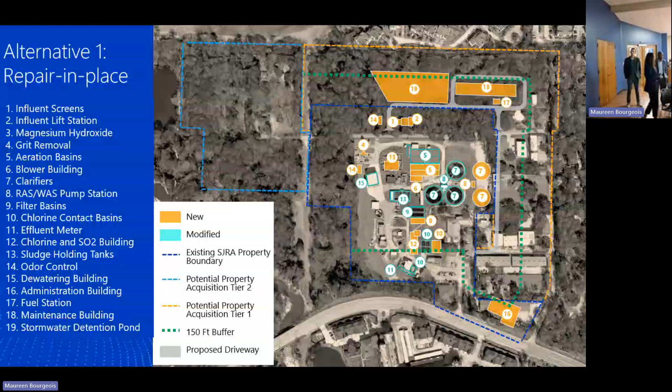Before we wrap up, next steps, yes sir.

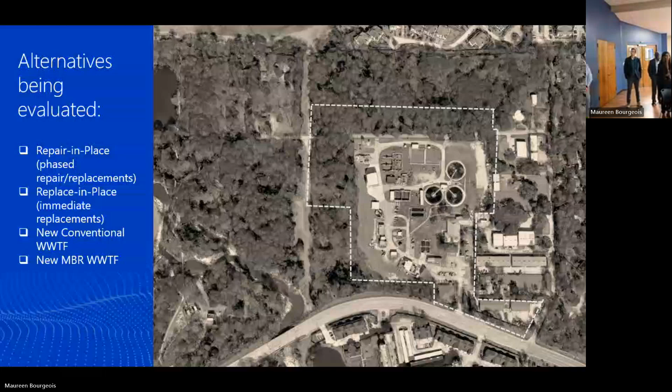So the next steps, as I mentioned, we are going through the cost process for all 4 alternatives. We'll take some of your comments into consideration as well. We are working on our condition assessment report that ties together the WJE report and the other assessment that Carollo performed on all asset types. We will get that draft report from SJRA as well. At next month's meeting we will go through all these details on the process. As you mentioned, you want more information on how we got to the hydraulic capacity and process capacity for the existing plant. We'll go through that and also a detailed evaluation of all 4 alternatives.

So will we see a more detailed explanation of what the cost estimates are, rather than just an NPV number? Yes, that would be okay. So for each of the 4 NPV cases, are you going to provide your assumptions, a project schedule, a cost schedule, and the discount rates, etc., the assumptions you used to calculate your NPV? Can you give those to us before the meeting, in a format that we can crunch in our own spreadsheets to confirm?